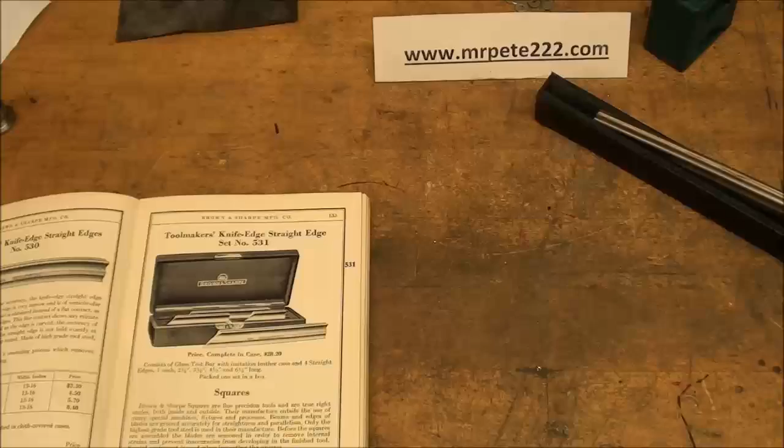15A was the question, go back and look at that if you haven't seen it. There were two items in this particular episode, number 15, and the first item was this.

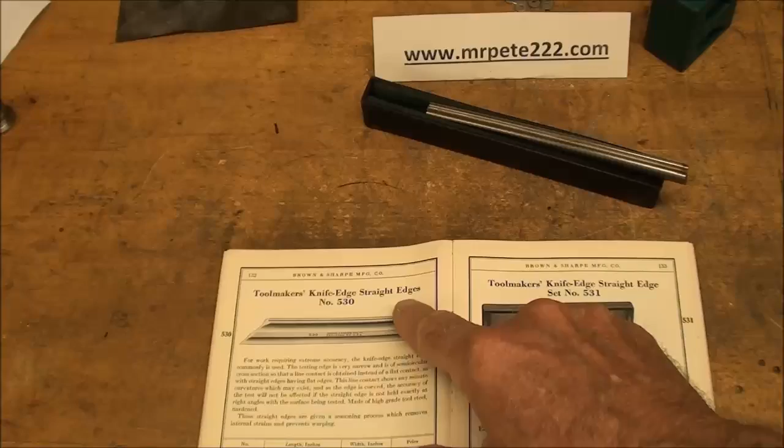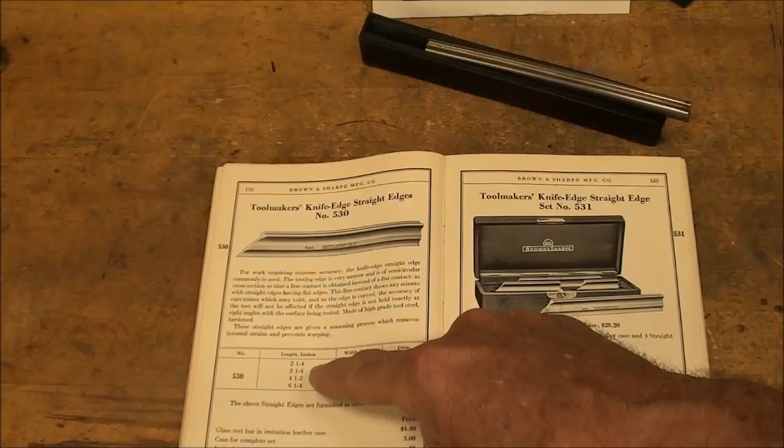Many of you had the answer. It's not a cutting tool or a scraper, but it is a tool maker's knife edge straight edge. I'll put a still of this so you can read the description here. These came in 4 lengths. Why you would want one only 2 1/4 long, I don't know, but this was the longest one, which is 6 1/4.

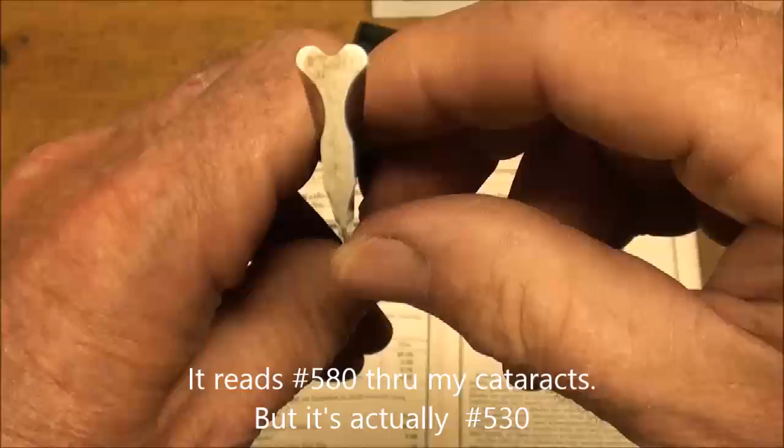It's the number 530. Again, a very interesting cross section. In addition to all of these shapes that you see, the actual knife edge itself has a radius on it.

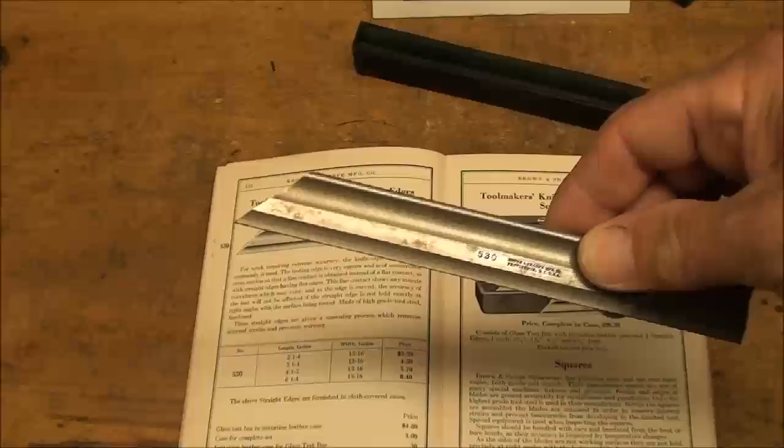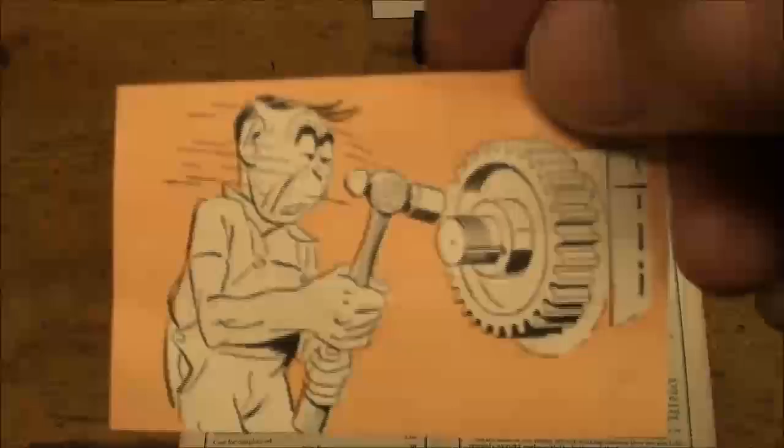The purpose of this, of course, is kept in a velvet lined case. It's highly precision, and you must be very careful to keep this guy away from tools like this, and there's one in every shop.

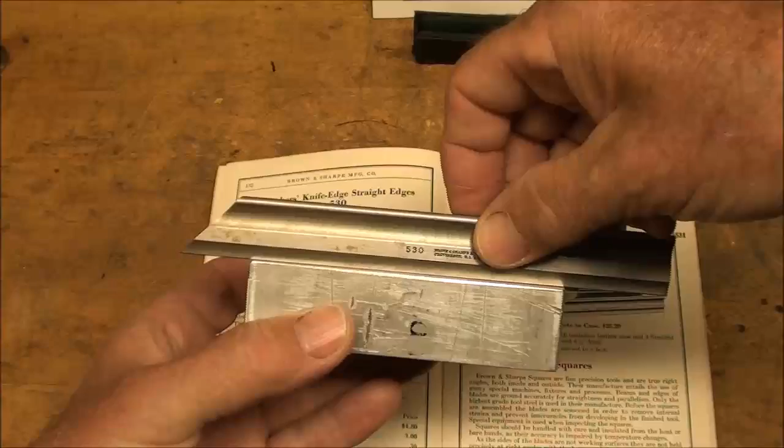It is meant to check to see how flat or how straight something is. He would hold it up to the light. I can't do that in this video, but I would hold it up to the fluorescent light and see if any light shone through there. I know this isn't a very true surface, but that's the purpose of a straight edge.

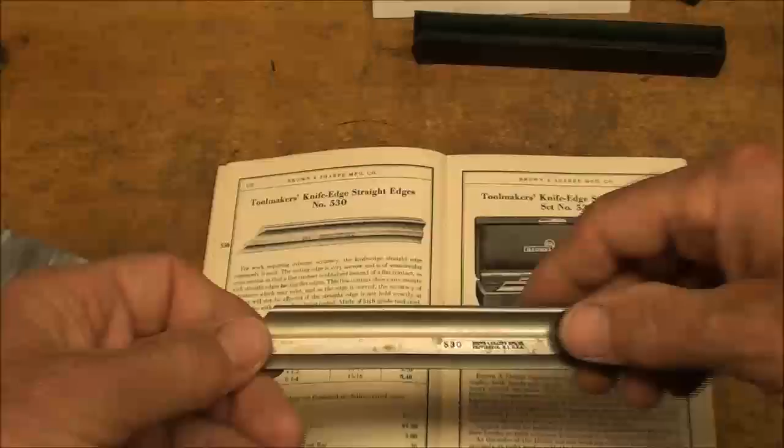And of course, they're available probably from other manufacturers in much larger sizes than this. This is made of a hardened tool steel, and it has been seasoned. If you know what seasoning is, that means that it is allowed to set for a while to remove the stresses and strains. Now that's probably all done by some other process. So that's what this item is, a tool maker's knife edge, straight edge.

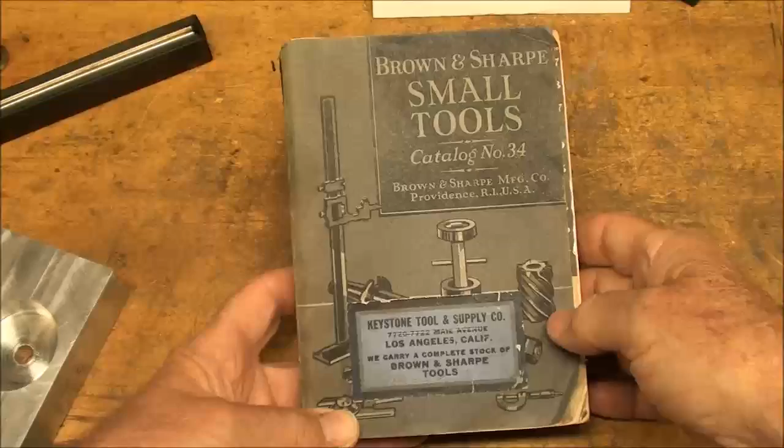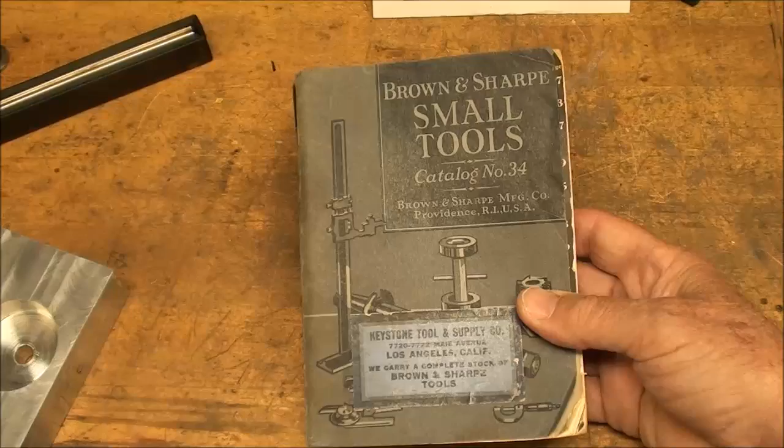That information about the straight edge came out of this 1941 Brown & Sharpe tool catalog, and this was printed just shortly before Pearl Harbor. I paid $10 for this from my buddies at the screw machine shop, and that is going out of business now.

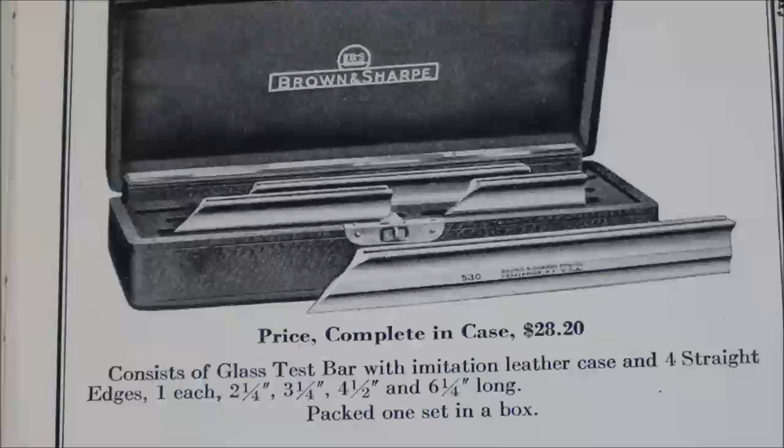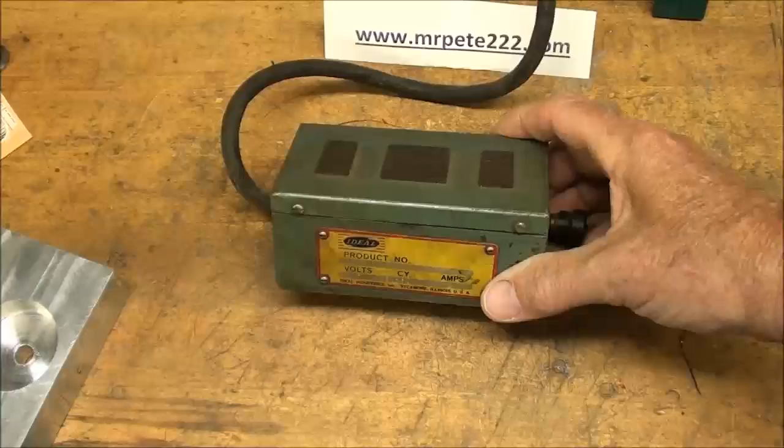This is a Demagnetizer Ideal, and there's the product number, made up in Sycamore, Illinois. That's not too far from me. I go to steam shows up there at Sycamore. It's 110 volt, has a momentary switch.

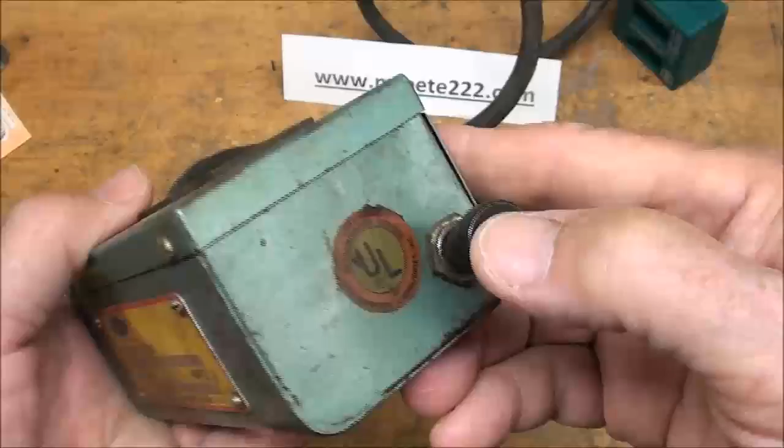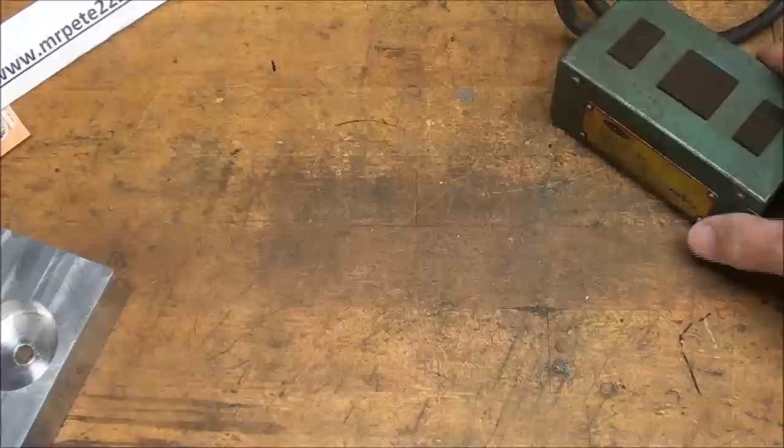Listen now. You don't want to leave it on, I'm sure it would burn up. The purpose of this is to demagnetize small tools and items that are in your shop. Because remember, magnetism can be your biggest friend or your worst enemy around a shop.

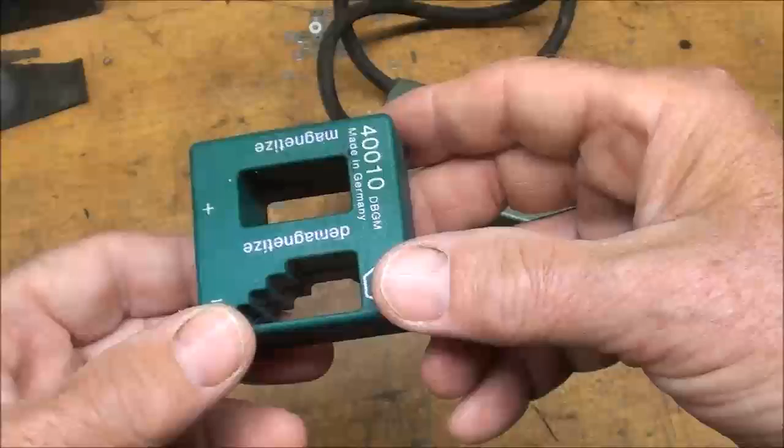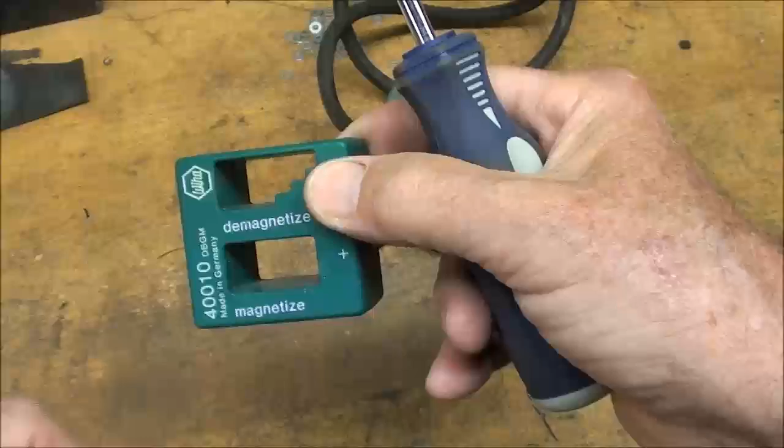So let's take a look at how that works, and I got a couple others to show you here too. This is one that I think you could buy at any hardware store, made in Germany. One side here will magnetize a tool such as a screwdriver, and the other hole here will demagnetize. You would just run your screwdriver or your item in there.

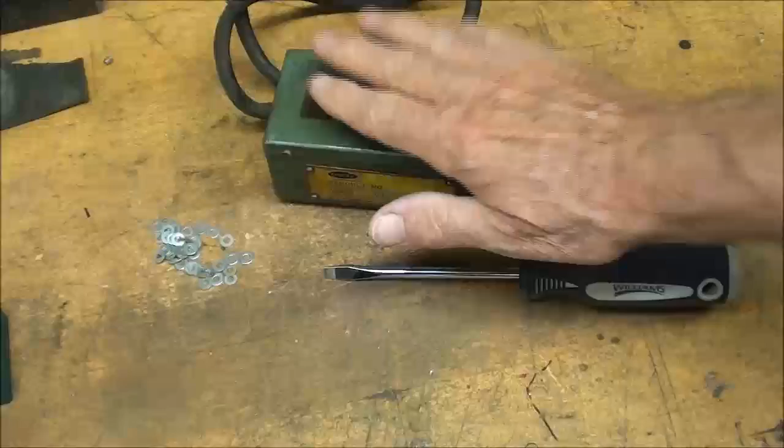Here's a little pile of steel washers, but you can use this both to magnetize or to demagnetize. So I'm going to magnetize this Williams screwdriver.

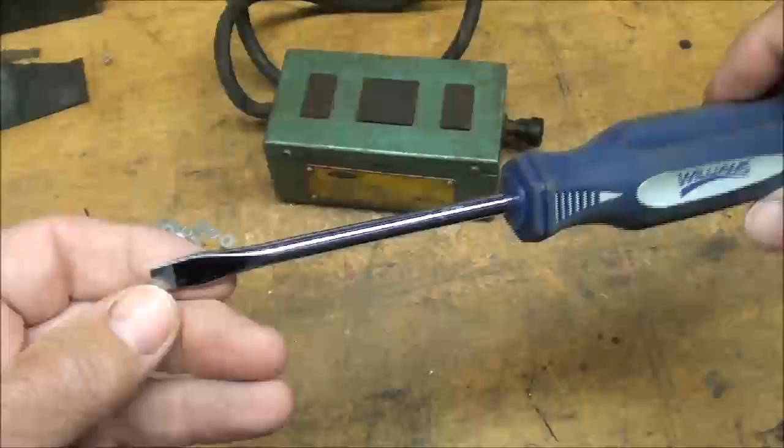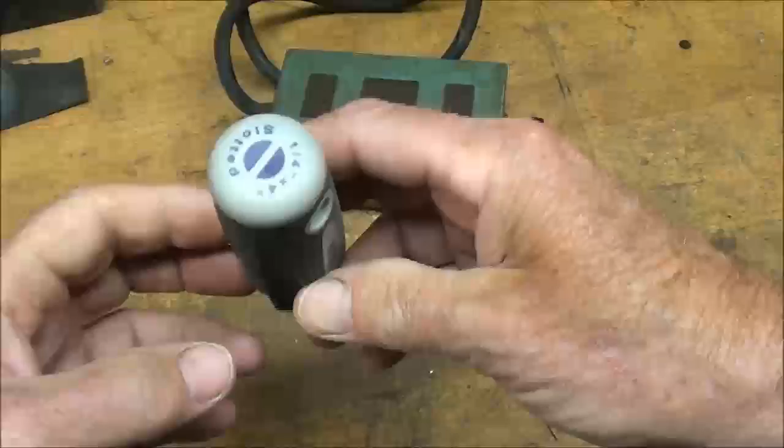By the way, I just got this screwdriver. You know, Williams, very high quality, expensive brand. I have never in my life seen a screwdriver that you could hang up. Normally we hang them up, you know, this way. This one could be hung from a hook. Pretty awesome. That's probably a $7 screwdriver.

Brand new, from an auction of course. This came from the screw machine shop also. I bought 2 of these, they were just $5 each. I sent one to my brother and Cody.

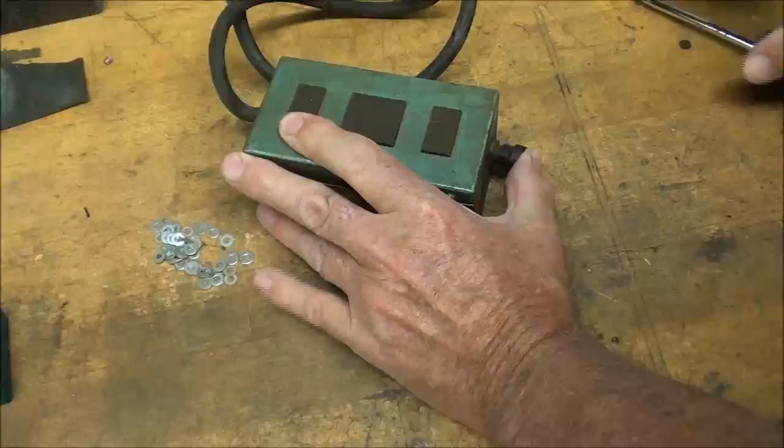But holding the momentary switch and just putting your screwdriver on there, or just, it doesn't take very long, we've turned that into a magnet.

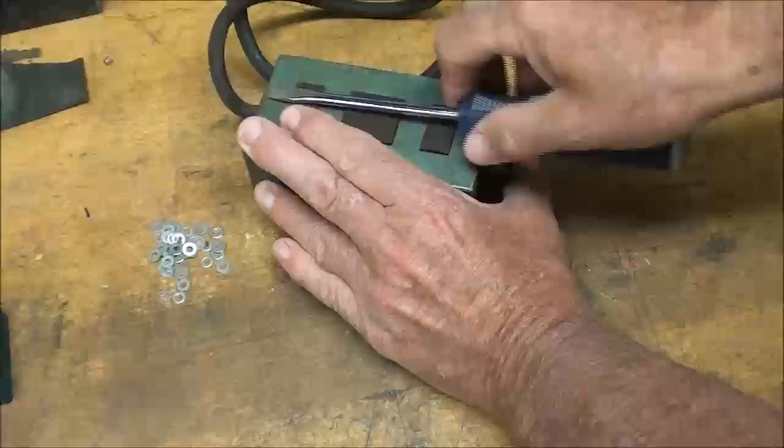Conversely, holding this on and swiping across, I have removed all magnetism, including residual magnetism, which can often be a problem when something lays around and touches another magnet or something that has some magnetism in it. So that's how that works. Very simple. Let me show you another one.

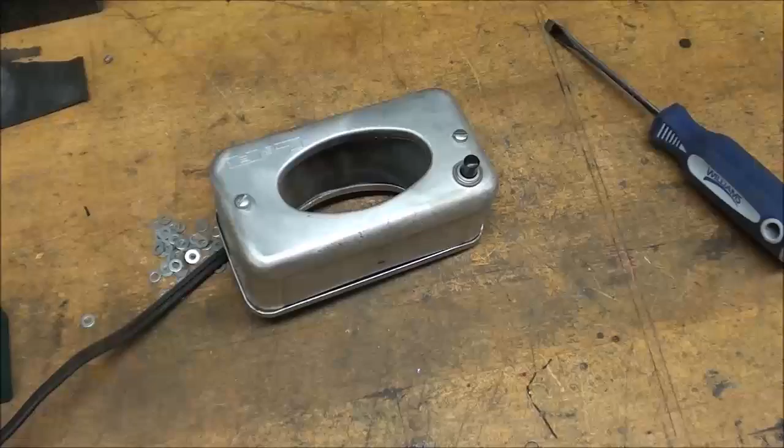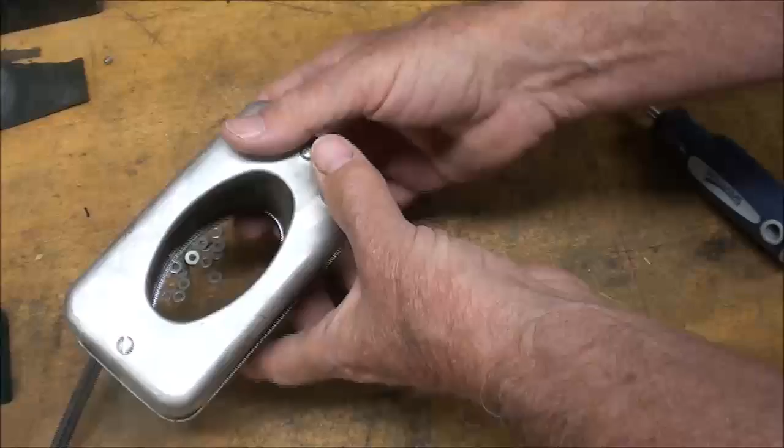I've had this one for a long time. This is actually a jeweler's demagnetizer. It would be used to demagnetize watches. And you don't want a watch to get magnetized. I'm talking about the old kind with a hairspring in it and all that. Nobody even has one of those anymore. Have you noticed that young kids do not carry watches? They hardly know what one is, and they just look at their phone to find out the time.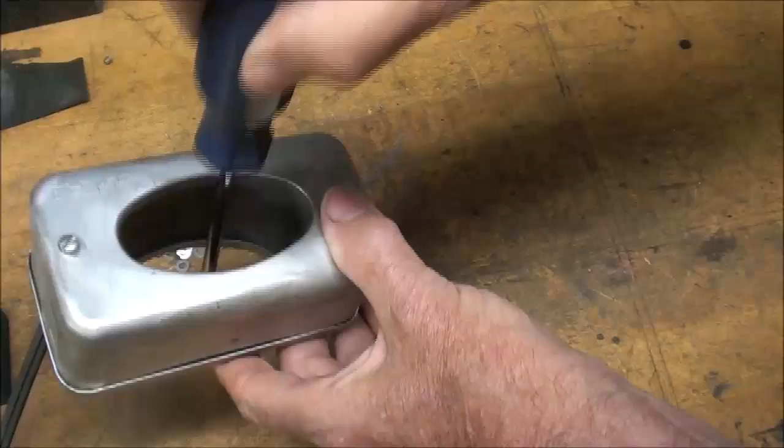Okay, again, a momentary switch. You won't hear this one humming, but if I put the screwdriver in there, I have magnetized it. And if you pass that in there, don't touch the walls, I have demagnetized it. And by the way, when you put it in there, you feel quite a force, a vibration, a humming, the power.

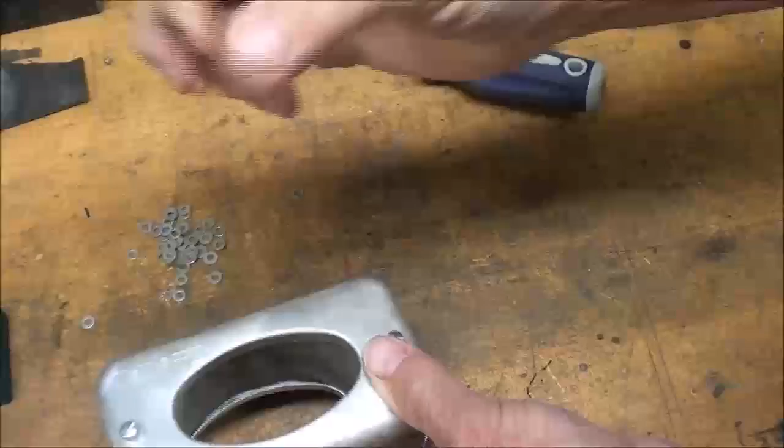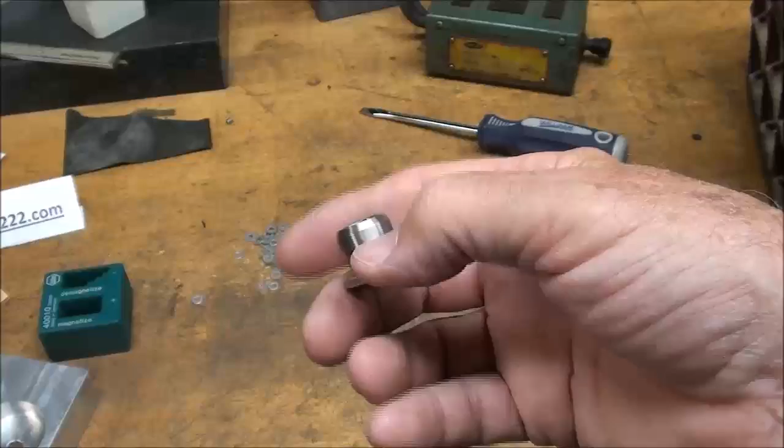When I worked at Caterpillar about 10-12 years ago, and I wasn't there very long, for perhaps a year, we were making fuel injectors, and here's a little part out of a fuel injector. These were made for Navistar and other companies too, and this particular one was used in the Ford Power Stroke diesel engine, part of the injector. But these would pick up magnetism because they were run through grinders. This has been precision ground both inside and out, and it would get magnetized, and between operations you had to demagnetize them. So there were perhaps 1,000 of these put into a tray, a basket, and it would be run through the demagnetizer.

Now the demagnetizer had to be pretty big to fit this through. You could almost crawl through it - a small boy could crawl through it - and it had a timer on it so that you would turn it on and just slide that tray from one end to the other, and then it would go off, because you needed two hands to run your tray through there. So instead of a momentary switch, it was a momentary switch with a timer on it.

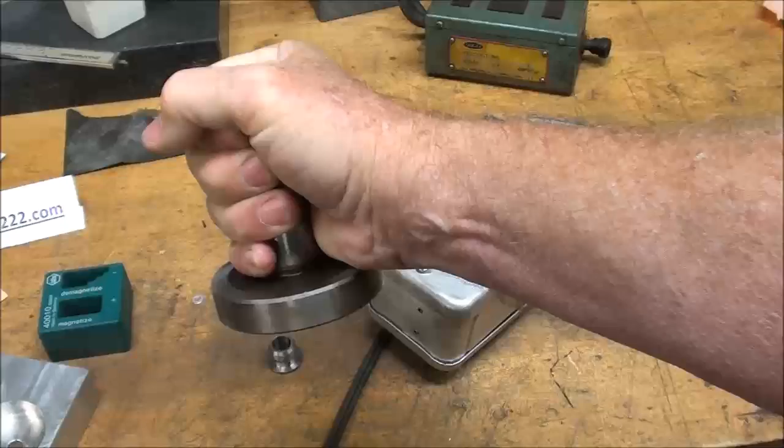But I like to take an item such as a piece of iron like this, and I would hold it in my hand and stick it in there, and the power that you would feel from that magnet or demagnet or whatever it was in there, it was just like, wow, there's this power. It was neat to do.

And I had been there a couple days, and I look at my watch. This was the night shift, and I'm there. Boy, time's passing slowly here, you know. It's 3 in the morning. I thought it was about time to quit, and finally you hear the bell ring and everybody's leaving, and it was time to quit. It had caused my watch to run backwards, and it was a battery type watch. So the guys told me, oh no, you take your watch off, put it in your pocket when you're around that thing. Don't get your watch anywhere near that. That's how powerful that magnet was at Caterpillar.

Must have really made the old light meter spin.